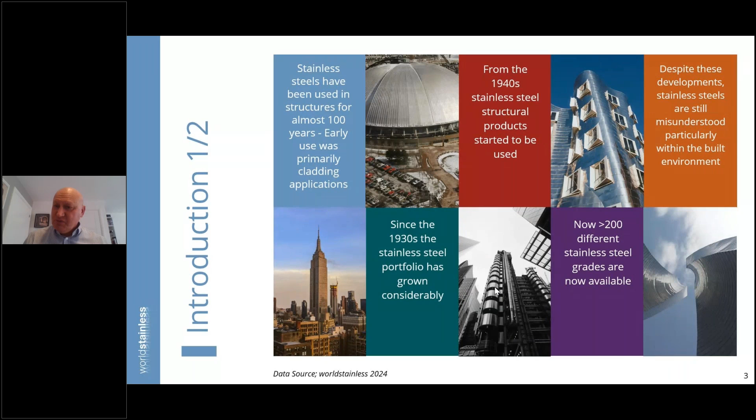Following on from that brief introduction, I think from the 1960s it's fair to say that more innovative uses of stainless steels for structural applications and components really emerged. Whilst there was some early use in the 1940s, it's from the 60s where things started to change, and then a further ramp up came from the 1990s. But having said all that, the steel usage in the built environment is large, at a global level around 900 million tonnes per annum, and only 1% of that is stainless. That's an interesting comparison, particularly when you see the problems that occur and make the news, in terms of bridges collapsing, buildings falling down. And often in those cases there is a high corrosion issue going on there.

And stainless steel deals with some of these things. It deals with corrosion resistance quite effectively. We're probably all familiar with that, but there are so many different types of stainless steels and so many different types of corrosion mechanisms - are we pairing things properly? That's one question. Stainless steels also have high strength, and not everybody is aware of that.

There are a family of stainless steels that offer very high strength, better than some structural steels, so these products should be considered. Also, when dealing with high strength corrosion resistant materials, you can reduce the quantity of other co-materials in structures.

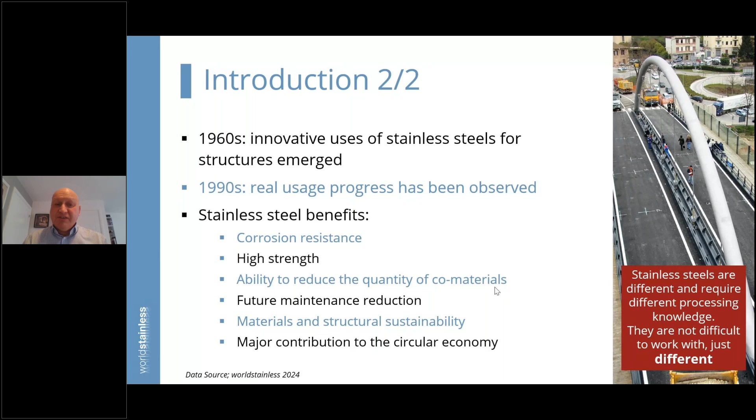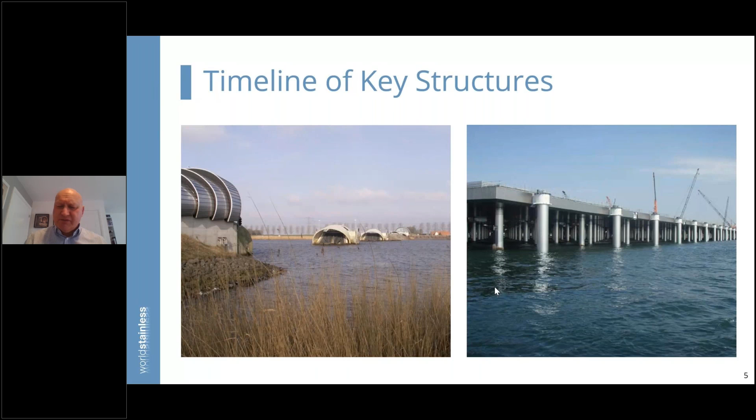So let's now start to set the scene further by looking at a timeline of key structures. This will be illustrated over two slides with images. I'd first like to start by going from the 1920s to the 1970s - there are a few interesting thumbnails, some of those structures you may well know already.

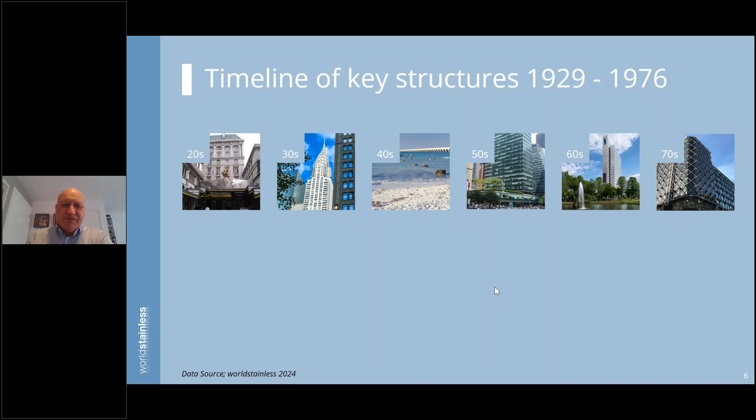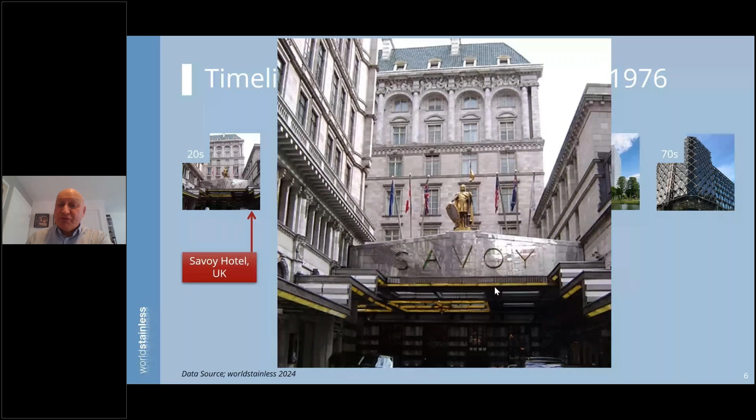In the 1920s, the Savoy Hotel in London, UK, is a very famous structure. The entrance, foyer, and canopy use stainless steel cladding. It's survived very well up to the present day, just gets regular water cleaning, nothing complicated, and still looks pristine in a busy urban area.

Moving into the 1930s, people will be very familiar with the Chrysler building in the USA, which opened in the early 1930s, so it's approaching 100 years old. What's interesting is the stainless steel cladding that looks pristine and still very attractive has only been cleaned 3 times in its entire life with a basic household detergent.

But because people back in the 1930s weren't sure how long stainless steel was going to last, 2 sets of this cladding were actually made. It's only a few years ago that the second set, which had never been used, was sent for recycling. I think that's an interesting perception of how people looked at stainless steel almost 100 years ago - they weren't sure. We know so much more now.

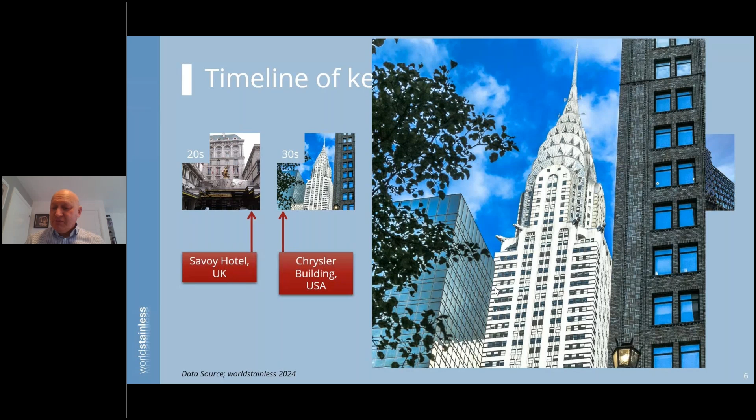So this is a great example of understanding your corrosion mechanisms to choose the right material for structural longevity. If you don't start with that basic level of interest, questioning, and understanding, you're likely to choose the wrong materials.

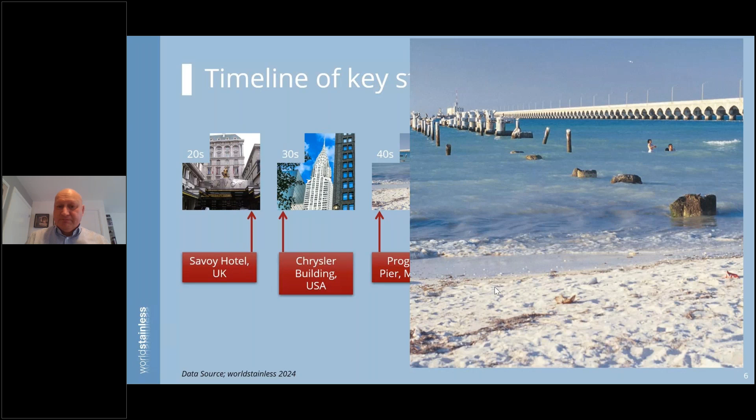Rolling forward into the 1950s, Lever House in the USA is interesting because originally, stainless steel was used as cladding for the structural components at ground floor level, protecting those structural steels and other materials. But over time, additional stainless was added, particularly in 2001, to improve the resilience of the structure - a great example of a building having stainless applied to deliver structural longevity, then further enhanced in later years.

It's not, I wouldn't say, a classic or impressive structure like the Chrysler building, but it's a very good example of thinking how to protect your structural components.

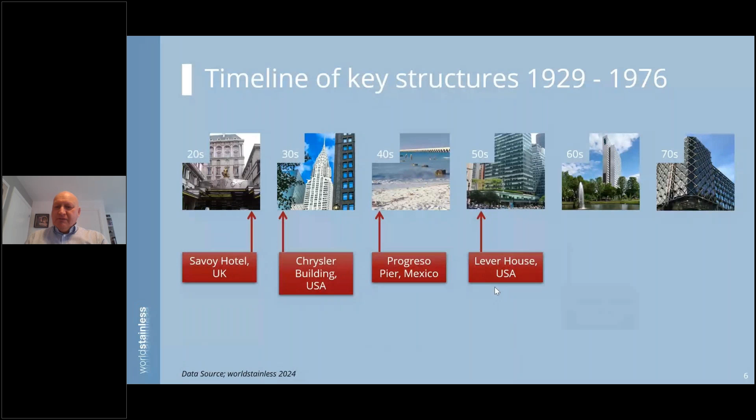If we move forward into the 1960s, we have the Thyssenhaus in Germany, which is primarily a clad structure. It uses some aluminium and a lot of stainless steel - specifically 304 grade stainless at 18% chromium, 8% nickel, 1.5 millimeter thick cladding, and it's just water washed twice per year to maintain its impressive appearance. This is a nice example of thinking how to employ stainless to good effect to protect the exterior of the building, with a low maintenance requirement.

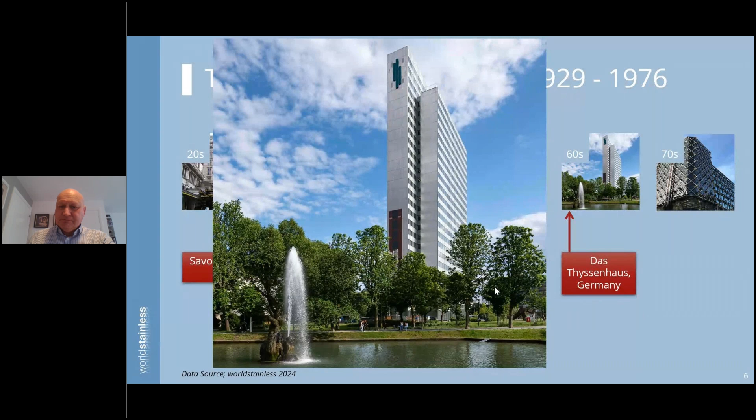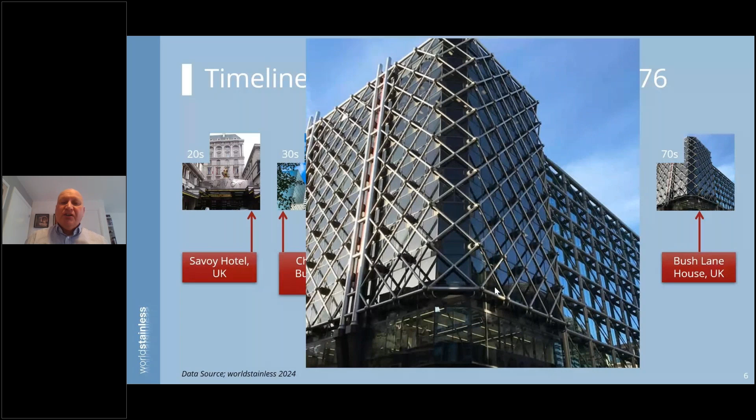The next case is Bush Lane House in London, UK, which is very innovative - I'll talk more about this later. What's apparent when you look at this structure is the exoskeleton around the building. This building had to be limited in height because of protected viewing of other impressive structures in London. The creation of the exoskeleton removed any need for internal columns, freeing up space on the 8 floors of the building. This is a very interesting case.

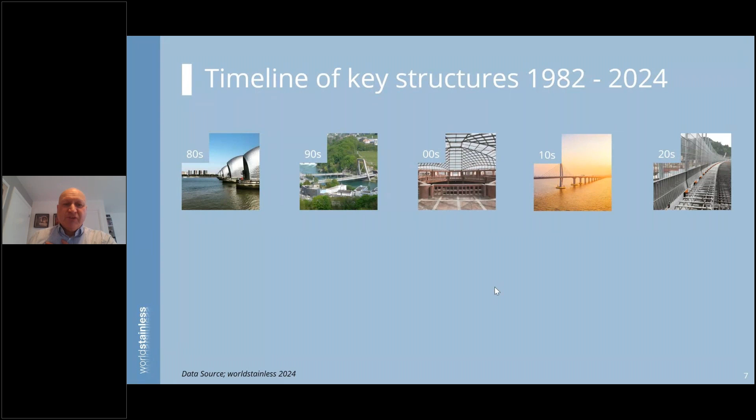Now let's jump forward. I'm going to move through the 1980s up to the present day, and what you will see now is more structures in this timeline of key structures.

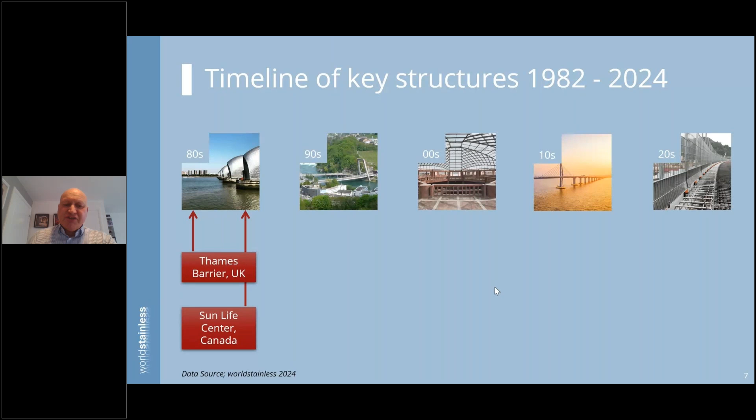We have the Thames Barrier in the UK, built in the early 80s, still looks perfect today, and the Sun Life Centre in Canada. This is another example of a clad structure - again 1.5 millimeters thick, 304 stainless steel, but also some structural cladding on the inside around the structural steels, which is less thick at 0.8 of a millimeter, and all the fixings used here are stainless too, which is an important consideration. Again, simple cleaning regimes - the outside of the building is just cleaned in totality when the windows are cleaned, and it doesn't require much effort.

Moving on to the 1990s, we have the Schaffhausen Bridge in Switzerland, which is going to come up as a case study a little later, but also the Petronas Twin Towers in Kuala Lumpur, which most people will be familiar with. These are a very impressive pairing of buildings, and this heavily uses stainless steel structural components that are extruded parts - so a different approach to making the structural components, but a strong use of stainless steel.

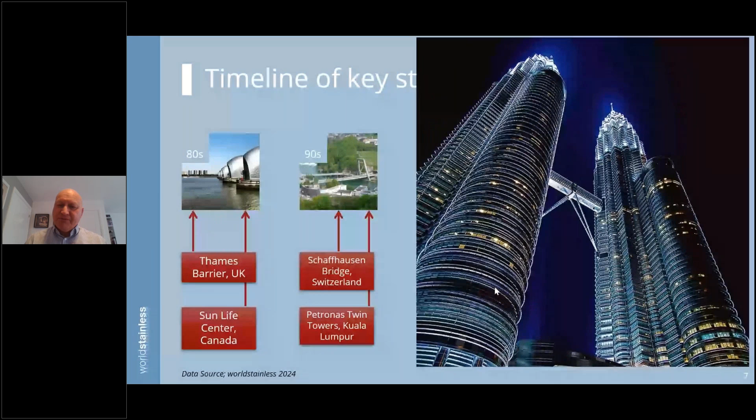Also added to this, because this is a very hot, sunny environment, stainless steel visors have been applied to all the windows to allow people working in this environment to not get uncomfortably hot or blinded. So there's some quite innovative use of stainless steel in the Twin Towers.

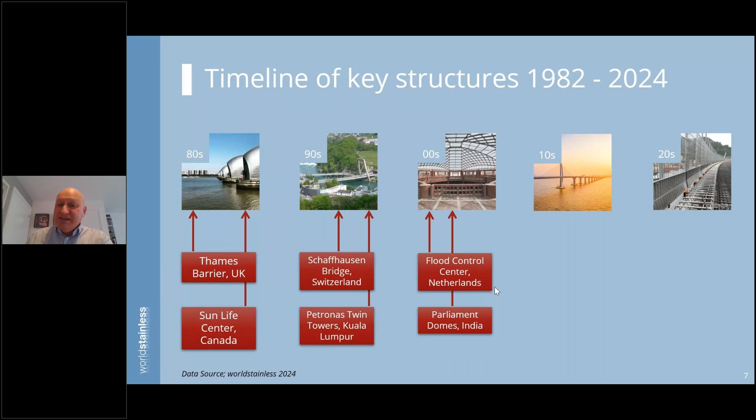As we jump forward to the early 2000s, we now have the Flood Control Centre, a series of buildings in the Netherlands using extensively stainless steel, and the Parliament Domes in India, but also the Atomium in Brussels. Many people will be familiar with the Atomium from the World Fair in 1958. Originally, these balls were clad in aluminium. They were replaced in 2006 with stainless, and that bright finish will resist corrosion, look really impressive in the skyline, and reflect the space around.

It gives a very impressive appearance wherever the sunlight is in the day, and if it's not so sunny, you still get different reflections. So this is a smart use of stainless to primarily replace aluminium that doesn't benefit from the same degree of longevity.

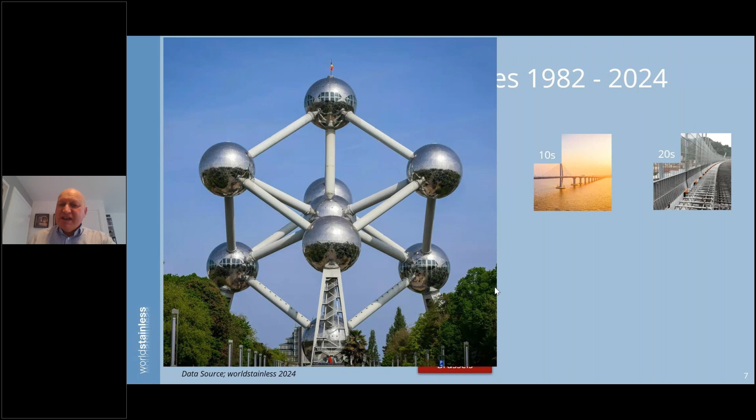As we move into the 2010s, there's a few important structures here. We have the Haneda Airport extension in Tokyo, built over the sea, which I'll talk a bit about later, the Rose Museum in China, and the Hong Kong Zhuhai Macau Bridge, which is shown in the thumbnail.

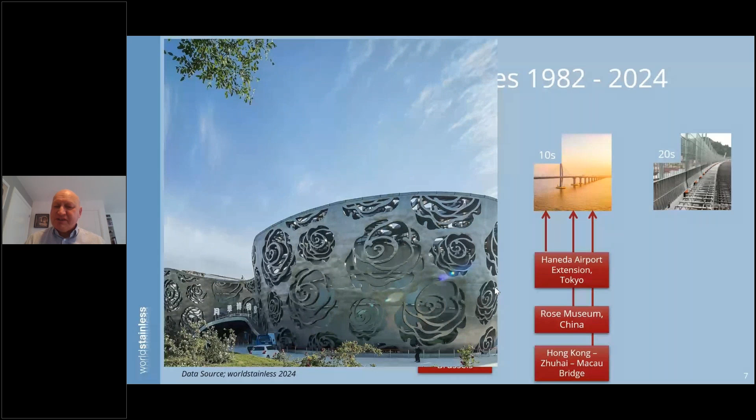What I want to illustrate here is the Rose Museum in China, which is an external, sort of artistic structure - I think that's probably the best way of explaining this - that protects the inside of the museum but looks stunning at the same time. From a designer's point of view, this is a very smart use of stainless, because this is not just a thin structure. If you look into the rose detail, it's actually quite a thick structure, but it's all made from stainless flat products. So it's very impressive and it's a novel use of stainless.

And moving up to date, people will recognise in the thumbnail the St George Bridge in Italy, which has replaced the bridge that sadly collapsed a few years ago.

You'll see in the thumbnail that there's a use of stainless steel reinforcement. It's what I'd call selective use, so it's not everywhere and it doesn't need to be. You don't have to replace all your structural steels with stainless. This notion of selective use is smart thinking, and I'll come back to that again later.

You have the Queenscliff Ferry Terminal in Australia, which I'll illustrate in a moment, and also the AVA Modular Footbridge in the UK, which is a full stainless steel bridge, bolted together, no welding. That brings a huge number of benefits that I'll talk about when I illustrate that bridge later.

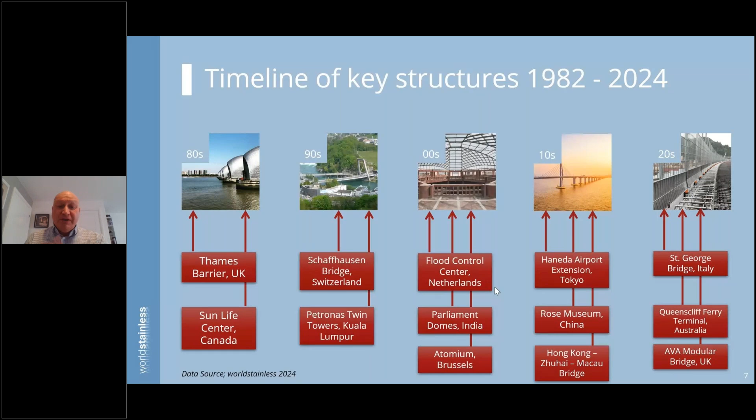Here's the image of the Queenscliff Ferry Terminal. This is quite impressive because even though you can't see the sea from this image, you can see the stainless steel on the roof space and some of the areas below. This was a particularly challenging environment, so the selection of the stainless grade was particularly important to resist what's known as pitting corrosion, and this grade does exactly that. As well as being beautiful, it's absolutely functional and should last a good 120 years.

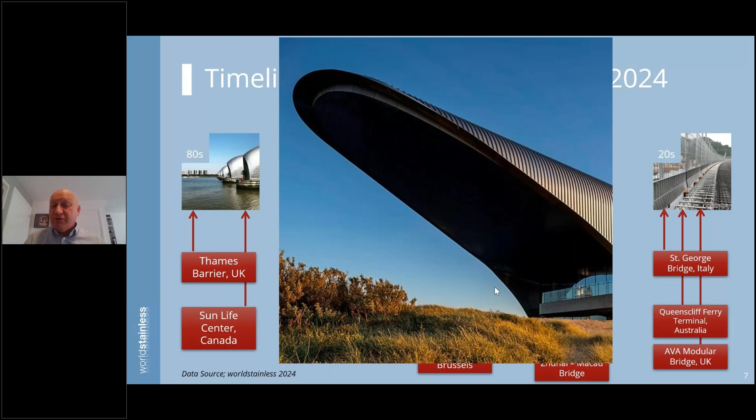So if we move forward, having given some nice illustrations, why would we select stainless steels? I'll start with myths, and this is not the full list, just the most popular ones. Lots of people have said to me, hey, the industry only makes two grades, 304 and 316, that's all there is. Well, there aren't. There are more than 200 different grades today. Do we promote them enough? Probably not, so there's work to do there.

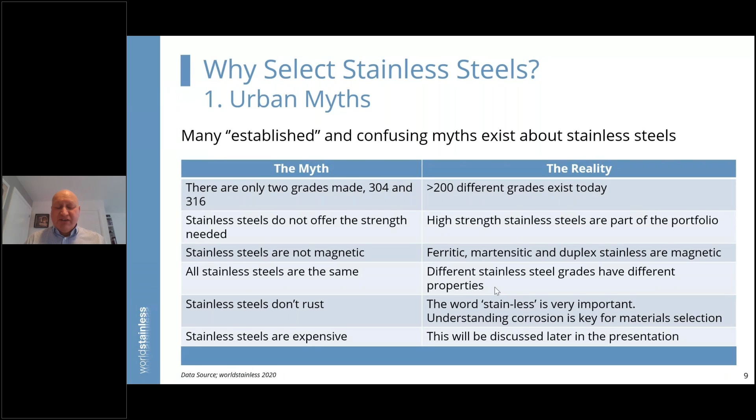Second myth: stainless steels do not offer the strength needed, particularly in structural applications. That's nonsense in itself, because we have high strength stainless steels and have done for a long time. They are an important part of the portfolio. But again, we need to educate people, get the concepts out there so they understand.

A bit of a strange one next: stainless steels are non-magnetic. Well, 3 out of the 4 primary families of stainless steels are magnetic to different degrees, but some stainless steels are non-magnetic and quite a lot are magnetic. It's not really important for today's webinar as such, but it's interesting what people think and the notions that stick in people's heads.

Following on from that, all stainless steels are the same - so many people have said that to me over the years. But we have lots of stainless steels and they all have different properties. They deal with different corrosive environments, so they're not all the same, they're very different. It's like horses - if you have a horse that runs well on a flat course, that same horse probably wouldn't be so good at jumping over hurdles, and vice versa. Stainless steels are a bit like that; they have different properties, different benefits.

The next one: stainless steels don't rust. I think the important thing here is to look at the word - it's stainless, not stain not. So if you understand corrosion, you can choose the right stainless steel. But if you don't think about corrosion, you won't necessarily choose the right one, and you probably will choose the wrong steel. We've got great examples of things that have failed because of that.

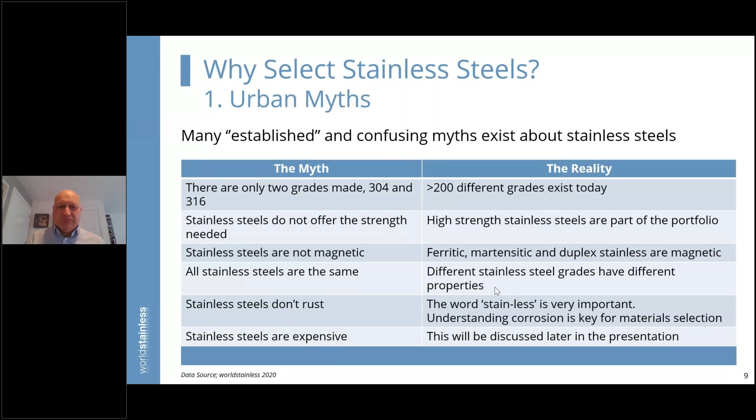So let's move on and look at the grade families now. I'm not going to spend several minutes talking about all the elements in these families - there are four broad families. Austenitic stainless steels, primarily used for kitchen equipment, food processing, chemical process plant. Ferritic grades, also used for cladding, kitchen equipment and automotive applications. The duplex family, where structural products really come into their own, along with fixings and materials for nasty environments like the oil and gas industry. And also the Martensitic family, used for cutting equipment, surgical instruments, valves and gears, etc. So we've got a huge range of properties to draw on.

But I think what's interesting when thinking about structures is that the duplex family becomes really important - what you've got here is very high strength materials with reasonable ductility, and they remain ductile down to somewhere between -40 and -50 centigrade. So this is a good product family to think about from a structural applications perspective.

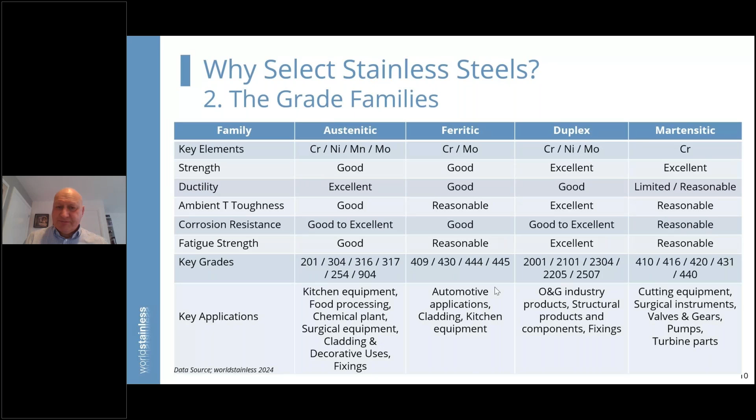Now I'd like to address the cost issue. I would argue that stainless steels are an economical material, but they're discounted because of their cost. You're going to pay at least 2.5 times that of a low alloy steel typically, sometimes more. But the advantages that stainless steels bring allow you to rebalance the pricing considerations.

The high strength offered by duplex grades allows for an overall materials reduction. For example, in the case of reinforcement, you can use somewhere greater than 20% less concrete, and that adds to the overall reduction in cost. So you pay a little more for the stainless, but you take something away.

Also, when you use stainless appropriately, you prevent structural degradation, so maintenance costs fall—I'll come back to maintenance a little later. And when you think deeper about stainless, you can start to redesign things to give enhanced operation and actually reduce the amount of materials in totality, including the stainless steel. So there's lots of opportunities.

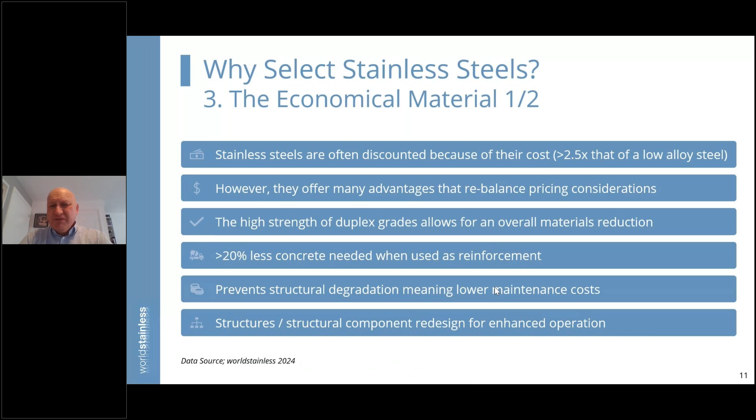So there are large savings to be had, but we have to think in a different way—to use stainless appropriately for the environment. You can control the upfront costs to be within 1 or 2% of not using stainless, sometimes less, and I'll come on to an example that's less. But then look at the maintenance benefits you get. Maintenance is not something that should be expected—it's something we can minimize or avoid.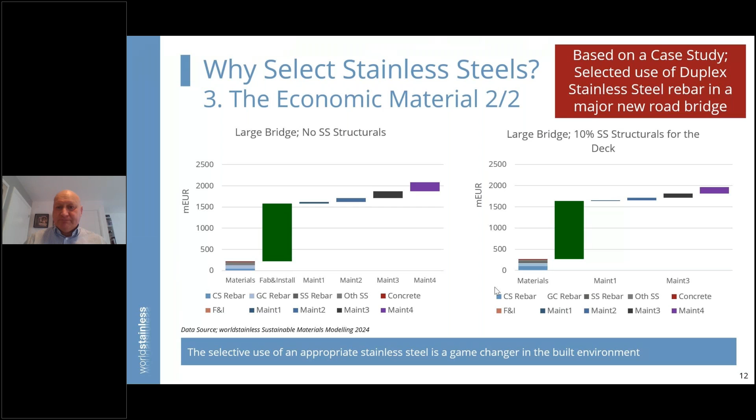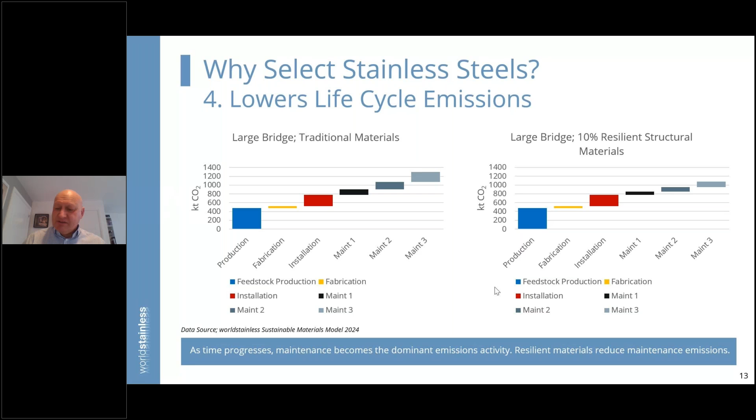In this section I'd also like to talk about corrosion, because it's pretty misunderstood. Stainless steels are corrosion resistant, as many people know, due to the invisible passive layer on the surface, which is self-repairing in the presence of oxygen. We also have coated steel products available, whether galvanized, epoxy coated, or just painted. But coatings fail—they always fail and create repair challenges, particularly if you're dealing with steel products that are hidden.

If you're going to hide your steel products inside concrete, you should know what's likely to make it corrode. There are 11 common forms of metallic corrosion, and you need to understand at least several of the common ones. If you know what forms of corrosion will be present in your environment and how they can attack your materials, then you can choose the right materials, particularly the stainless steel grades that give the right protection—choosing the right grade in the right location within a structure. You can take this notion of selective use of stainless quite far, so you don't necessarily have to have stainless reinforcement everywhere, unless you're making structural components from stainless, for example.

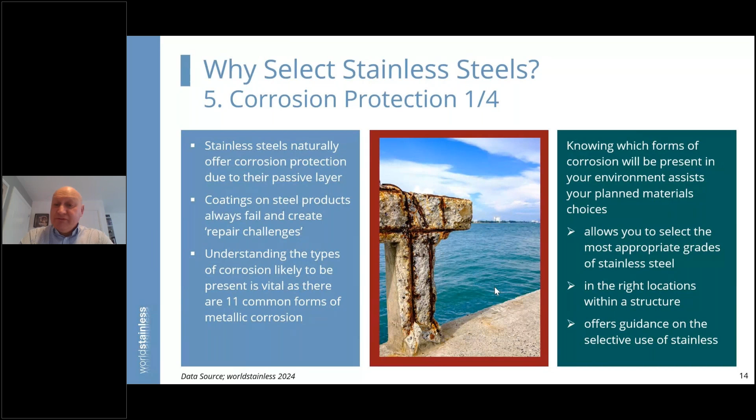Now, to move on and illustrate that, I'm going to talk about four different types of corrosion. Pitting corrosion, which I'll illustrate a bit more on the next slide.

If you're working in a marine environment above the snow line where de-icing salts are used, or in a setting where airborne chlorides, sulfur-bearing oxides, and things like that are present, you're likely to suffer from pitting corrosion, and you need to choose a grade that will prevent it. I'll illustrate that in a moment.

Galvanic corrosion is another issue. If you've got different metals in direct contact, and you've got some electrolyte present permanently or intermittently, you need to understand how galvanic corrosion is going to occur.

And whilst people will say, hey, I can overcome this by sticking on an electrode that's going to corrode first, a sacrificial electrode, that's useful in certain circumstances, but it causes problems as well, because the sacrificial electrode is sacrificial. Once it's gone, if you don't replace it, other things will happen.

But also, people overlook where galvanic corrosion subtly occurs around fixings and jointings in built-up systems. So galvanic corrosion is not as straightforward as some people would have you think.

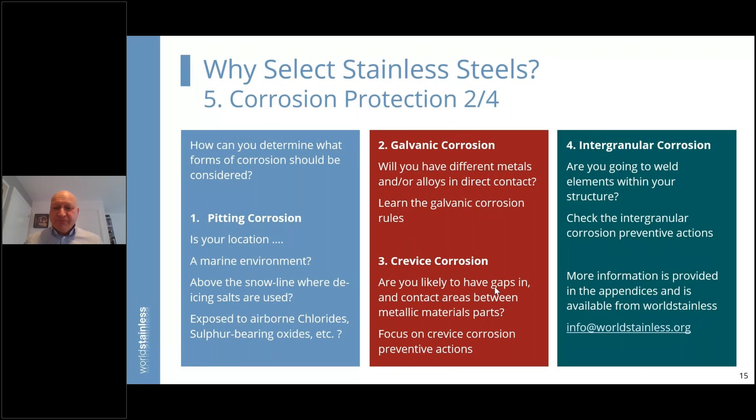And intergranular corrosion should be considered if you're going to weld elements within your structure, and again, understanding how to work with that is important. worldstainless has lots of information on these types of corrosion. I'm going to illustrate two next, but you can get more information directly from us.

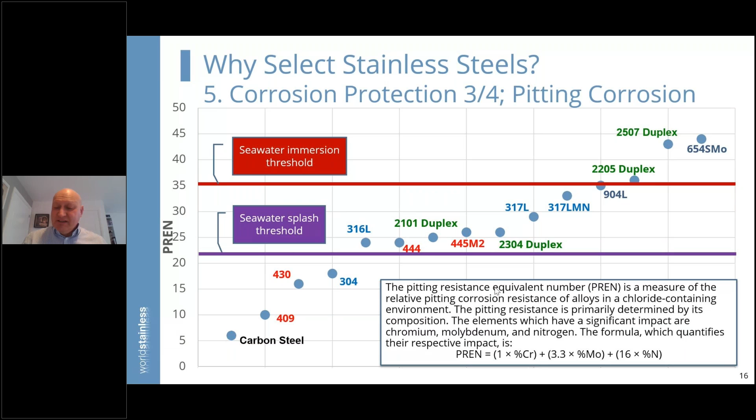Galvanic corrosion is the other thing I wanted to illustrate, and I think many people will know this. Two different metals in electrical contact with a conducting electrolyte will give the strong likelihood of galvanic corrosion, particularly if you've got what's called a noble metal in contact with a less noble metal.

So stainless steels are generally noble. The duplex and austenitic grades are very noble, ferritic and martensitic less so. But the less noble materials that tend to corrode include zinc, aluminium, general steels, carbon and low alloy, brasses, and copper. And as long as these conditions are in place...

The electrochemically dissimilar metals, the metals in contact with each other, so a current can flow, and an electrolyte present, which can just be simple water or some cleaning solutions - when you've got these things, you need to be fully aware of galvanic corrosion. And it is easier, I would argue, to choose the right materials to avoid galvanic corrosion rather than rely on coatings or sacrificial electrodes to solve the problem, because these things don't work forever.

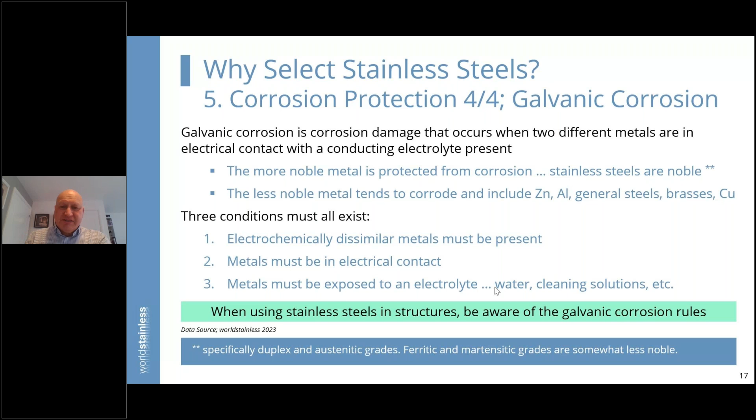So, an important aspect, galvanic corrosion, and there's appendices that cover this in a little more detail attached to this presentation.

One of the key benefits is the ability to reduce co-materials. If you exploit the high strength of duplex stainless steels, you can reduce concrete, and less concrete cover is needed because you're putting in a product that will resist corrosion, particularly pitting corrosion. But also, when you start to think about employing stainless steels for structural components, you can lightweight your whole structure. So you can bring down the total amount of materials, because when you're using stainless steels that are not just corrosion resistant but have high strength, better than that of some structural steels, you get the lightweighting opportunity. There's an example I'll illustrate a little later in this presentation.

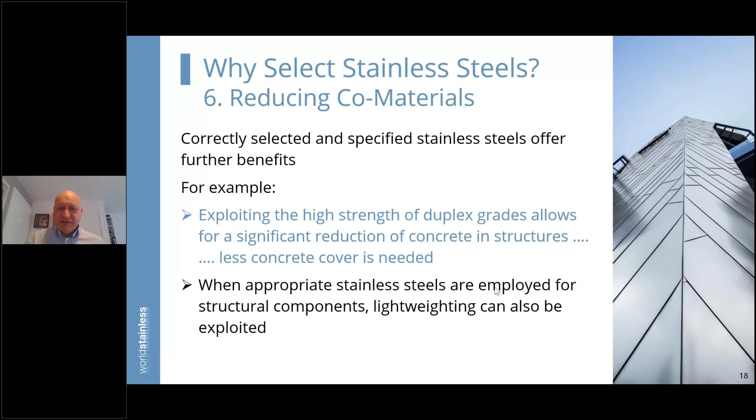In summary, there are many good reasons why you should select stainless steels, why it should be part of your portfolio, because you've got a wide range of things to choose from in terms of grades and products. These materials are designed for corrosive environments, so don't overlook them. You can reduce your bill of materials quite sizably. You can deliver a reduced life cycle cost and lower your life cycle emissions - let's think beyond the production emissions boundary. You can reduce your maintenance needs, which has to be good. We're all sick and tired of seeing roadworks that delay our journeys, seeing facilities that don't work. We can eliminate those. And you can rethink your material choice and your manufacturing routes - I'll come on to the notion of modular manufacturing in a little time. But ultimately, and I think should be the goal for all of us, we want long life structures. And when you're using stainless, these things look really appealing as well. You're not creating something that looks outdated very quickly.

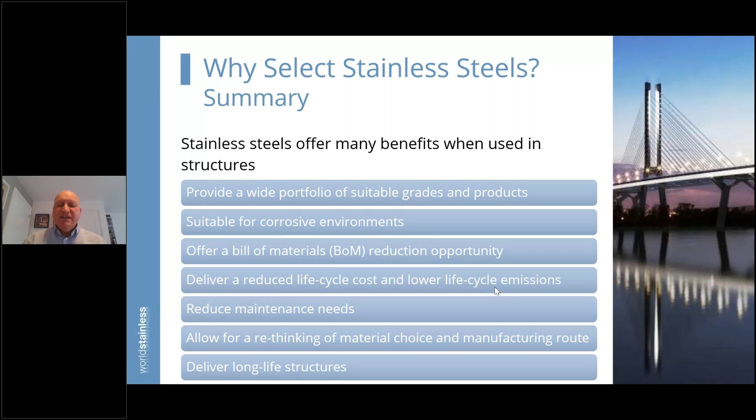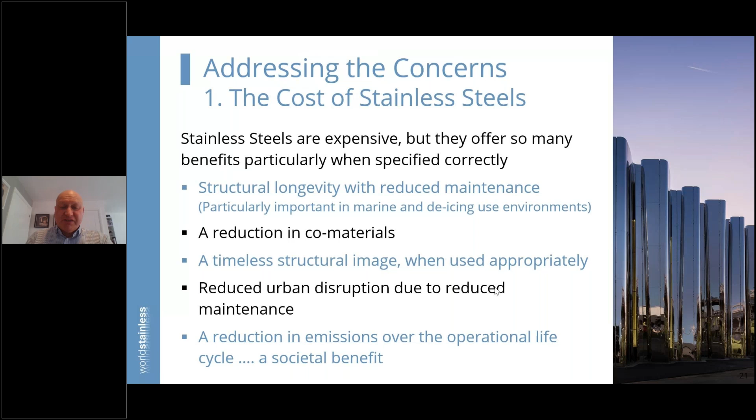So let's move forward and address the concerns. The cost of stainless - I've touched on this with the waterfall diagram and the fact that you get lower life cycle costs. If you take maintenance away, which is particularly important in environments that are going to give you corrosion problems, then you start to save money. If you take your requirement for total materials away, you start to save money. If you don't have to replace things quickly, you clearly save money. If you reduce the amount of urban disruption because there's less maintenance, other people benefit from that - society benefits. And if you're working with a material that delivers lower emissions over the operational life, that's very good. Those are hidden emissions almost - we don't talk about them very much, we don't see them, but they're a significant component of our total CO2 and other emissions into our atmosphere. So stainless does address a lot of concerns from a cost perspective.

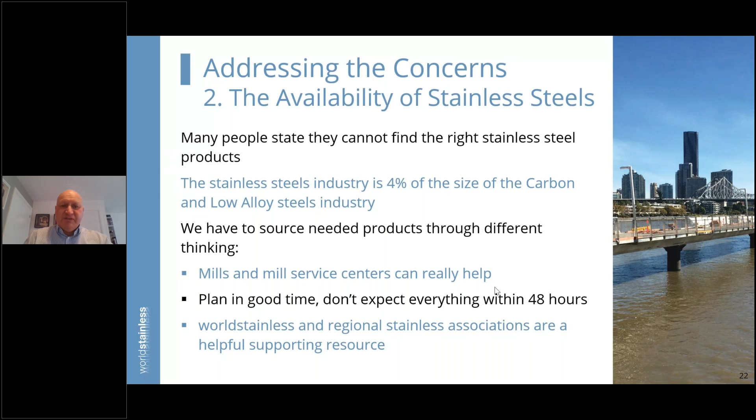Now, the next couple of things are a little less obvious. Many people have said to me, well, I've not chosen stainless because it's difficult to get the right products. I think you have to start with a different mindset. The stainless steel industry is about 4% of the size of the carbon and low alloy steel industry, so we're small. Because we're small, you need to think about sourcing differently. Mills and mill service centres can really help you - they will point you in the right direction, tell you how to get hold of the products, the lead times, etc. Not all stainless products are off the shelf yet, so you have to plan in good time. Don't expect to pick up everything from a stockist in 48 hours. That shouldn't be a reason for not choosing stainless - it should just drive a different thought process. Both World Stainless and the regional stainless steel associations are helpful resources. They will assist people who need support with sourcing materials, and we should exploit that - it's a good network.

Now, the third concern is that stainless steels are difficult to fabricate. As I said early on in this presentation, it's different, not difficult. Steels do need different treatment, often in fabrication, but it's a skill set you have to learn - it's a different set of rules. There are also different ways of doing things - structural components can now be produced through automated routes. Laser cutting and brake press forming of stainless steel sheet and plate can produce structural components very quickly, and that allows for bill of material standardization, which helps a dramatic number of things. Again, we come back to the stainless steel development associations - these people run practical education courses for your fabrication processes. They're out there to help, and it's worth checking who's doing what and signing up for these courses. You'll learn some useful skills, some good knowledge, and that's all positive. World Stainless can also help you find your nearest association.

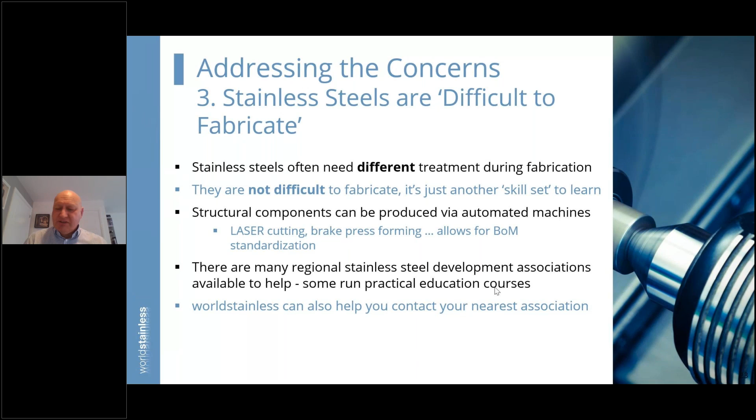Now, moving forward, I like to think about stainless steels, designing and specifying them. People say this is not always easy either, but there are many structural specifications out there covering design and fabrication, as well as the product standards. So you've generally got three different types: product standards, design standards, and fabrication standards.

At the end of this, in the appendices, is a huge specification reference list. So everybody signed up for the presentation will be able to access that list and see where to be signposted to. American and European specifications and their codes are the most widely used today, but the Chinese specifications

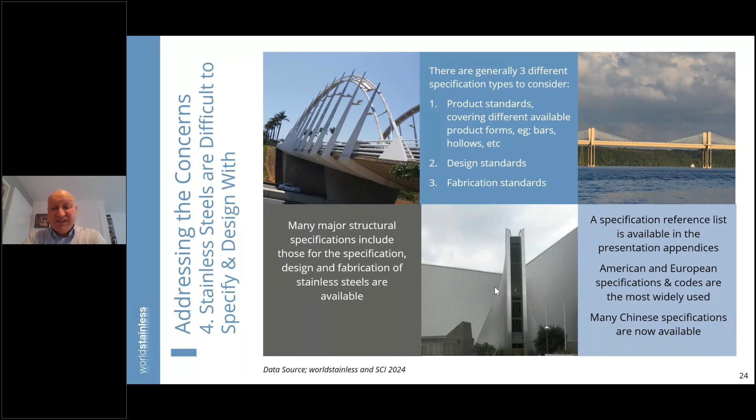In terms of modern thinking, I'm going to be a little controversial here. Modern or forward-thinking people have been around for a long, long time. We probably know some of the people from a long time ago, but modern thinking ebbs and flows and becomes distorted by what I call money madness. I'll start to illustrate this over the next few slides.

But if we think about building a structure, do we genuinely consider what is best for the people that will use or benefit from that structure?

I think there's a number of issues here. Is the structure always going to be accessible? Is there a high reliability of all the features that the users require all the time? Is the building or structure always going to be safe? No deterioration of the public areas, the structural elements? Is fire safety correctly specified and defined? Is it addressed properly? Do we do these things to the best of our abilities?

And do we make facilities inclusive, suitable for people with mobility challenges, for example? I think we don't always do that. We don't get the best for our users because short-termism dominates. I would argue that in many cases, the notion of creating something and using something are separated. So if you make something with a low cost mentality, you won't get something that works well into the future.

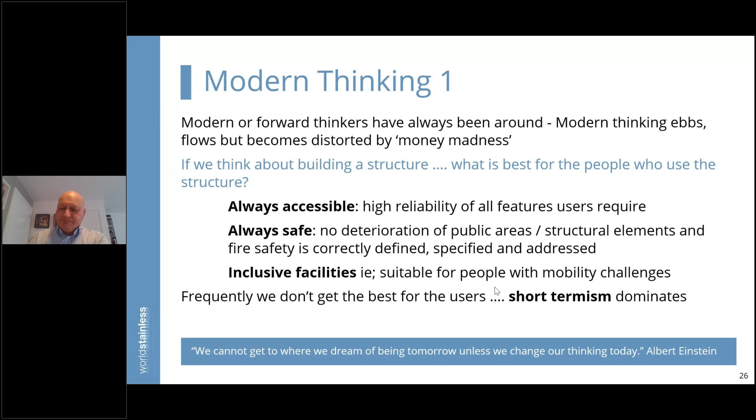Now, moving forward and taking this notion into account, I'd like to touch on the Schaffhausen Bridge in Switzerland. This was opened in the mid-1990s, so about 30 years ago. For the construction of this bridge, life cycle thinking was at the heart of the development.

Closing this bridge for maintenance would have created a massive problem for people moving around, for freight movements. So the bridge was designed fully with stainless steel reinforcement, and the actual cost, because you could reduce other materials, was 12% lower than a traditional approach. So this is a fantastic case of stainless steel not being expensive.

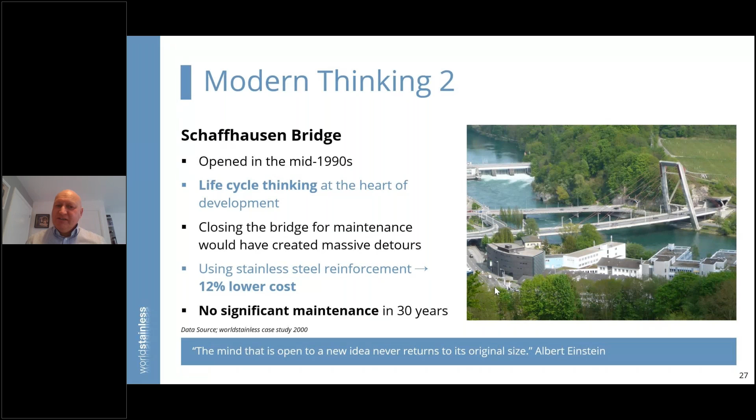And over the 30 years that this bridge has existed, it's never been closed and no significant maintenance has been carried out. So this is a great case study to say, hey, once you start thinking differently, you can create something that ticks all the boxes.

Now, I've touched on maintenance a number of times, and I would argue that for many companies, it's seen as a profitable activity, but in my head, that disrupts modern thinking.

So, question, ask yourself this: how many times do you find an elevator or an escalator not working somewhere? Yesterday, I saw 5 in the same building, which is staggering. Five escalators not working in the same building. Have we accepted that this is just normal? I think it's not normal, it's abnormal.

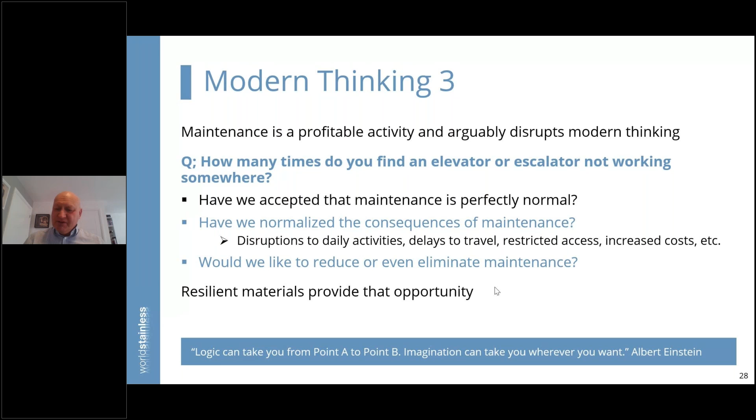But have we normalised the consequences of maintenance, the disruptions to our daily activities, delays to travel, restricted access, increased costs, whether personal or for businesses, just happening? I would say this is not the right way to think. If you choose resilient materials, you provide the opportunity to reduce or eliminate maintenance. So I think this is a start point of how we should think about things going forwards.

And I'll illustrate this with Bush Lane House, which I talked about earlier.

As you now know, it's got a stainless steel exoskeleton, but the whole thing was driven by the need for a view of St Paul's Cathedral as a fantastic and memorable structure in London. So the height was limited, the need for internal columns was avoided, and fire protection was overcome by water cooling in the exoskeleton itself. This was made out of stainless steel duplex grade 2205, which at the time was probably one of the most common duplex grades. If you look at the project targets, all these things were achieved with a different way of thinking. I think this is one great example.

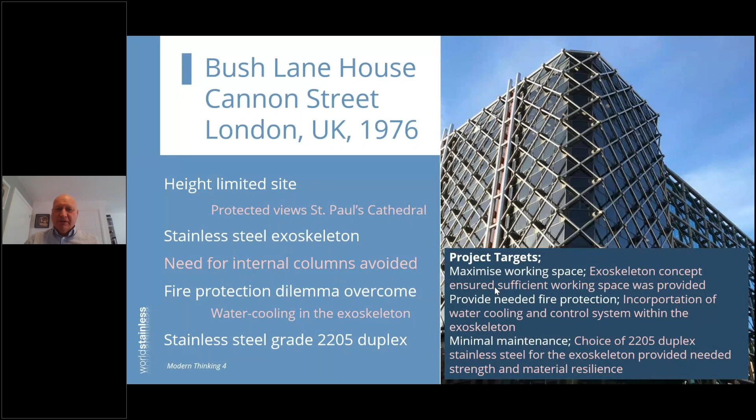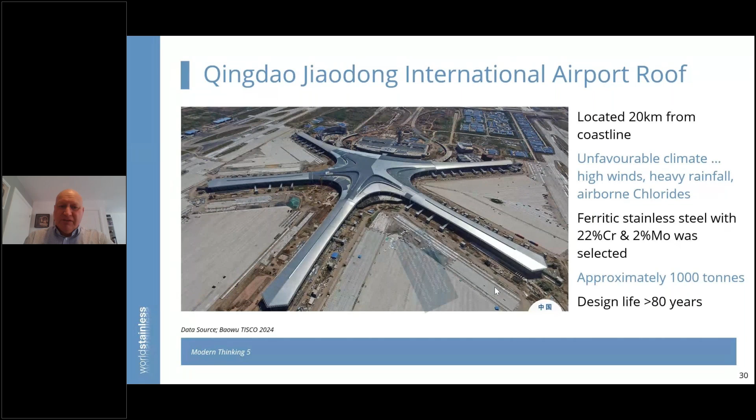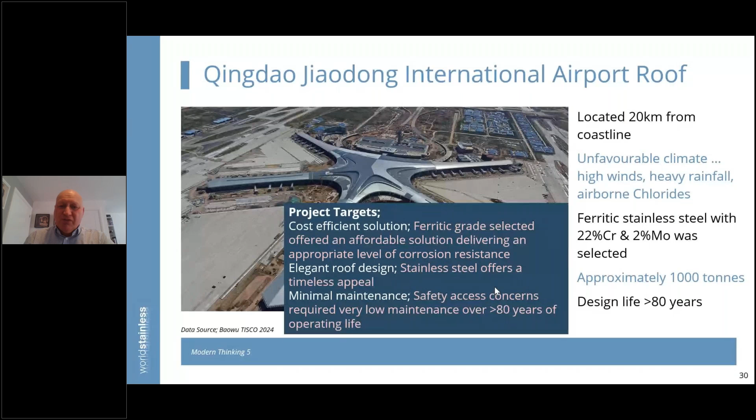If we look at the targets: an affordable metallic solution delivering the right level of corrosion resistance - that was achieved. An elegant roof design and minimal maintenance - all those things achieved with an extensive use of stainless steel.

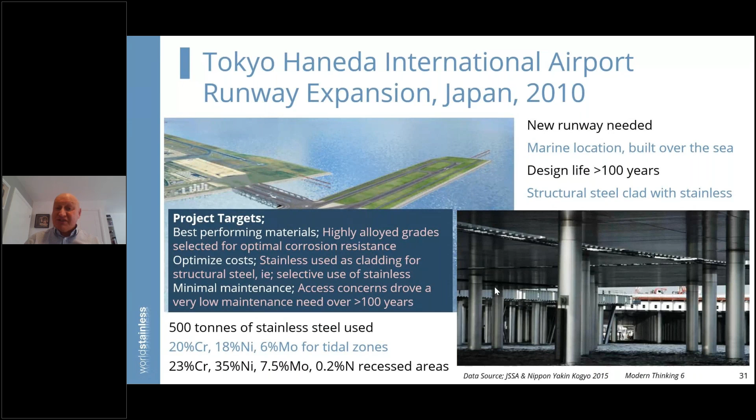Finally, in this section, I'd like to illustrate the Ava modular footbridge, which is a 100% stainless steel bridge made as a modular structure from flat stainless steel components that are formed into structural components - no welding, everything's bolted together. It's about 70 tons of stainless steel per bridge compared to in excess of 100 tons for a more traditional materials bridge, and it comes in cheaper. The benefits also include the elevator system, which is the most reliable in the world, with accessible and duplicated drive systems - so if the drive system or any element of it fails, the elevator still keeps working. The capex was 30% lower. You've got a timeless appeal that requires low maintenance and a guarantee of 120 years of operating life. So this is a tick-all-the-boxes solution, which is fantastic.

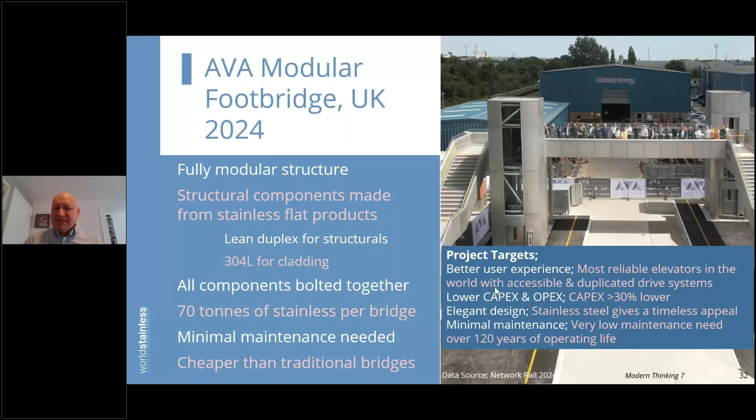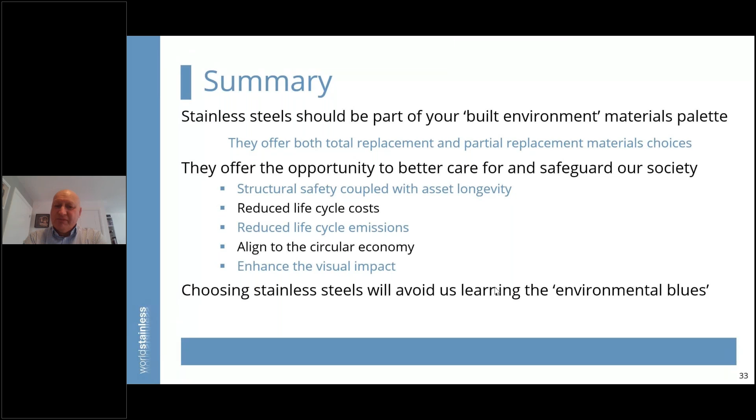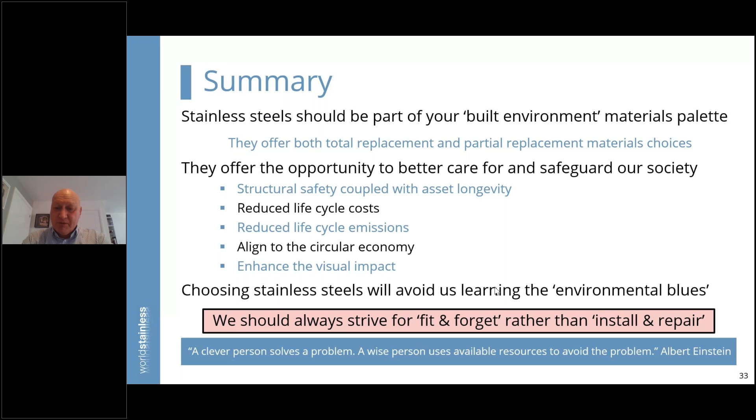So, in summary, before we jump to questions, I would argue that stainless steel should be part of your built environment materials palette, both for the total replacement, as in the AVA bridge, or the partial replacement of your materials choices. When you're choosing stainless, you create the opportunity to better care for and safeguard our society. You're not going to have things that fail. You deliver structural safety, you deliver asset longevity, you reduce life cycle costs and emissions, you're wedded to the circular economy, and of course, these things look amazing. I would prefer that in the future, as a society, we're not learning a new song called the environmental blues, because we are choosing the right materials. We're striving for fit and forget rather than install and repair. As Albert Einstein said, and I've littered this presentation with a few quotes from Albert, a clever person may well solve a problem, but a wise person uses the available resources to avoid the problem. So with that, I'd like to thank you for your attention and hand over to questions.

There is a question here: any suitable recommendations for a stainless steel grade for railway applications, for instance the railway track, the ballastless track slab, derailment curb, containment system?

I think when you're looking at the track work for rail systems, stainless steels are not necessarily the right choice at all. I would not recommend them because you have many other considerations. When you think about the ballasting and the sleepers, again, concretes and aggregate material are more suitable than stainless.

I think for railways, you need to think about station structures and cladding on stations. You need to think about elevators carefully. And when you've got electrified overhead lines, stainless has a place, but you don't need a high cost stainless. There are plenty of examples around the world where stainless steels have been used for the mounting frames for the catenary systems, and they tend to be lower cost stainless that will survive without any maintenance required for 100 years at least.